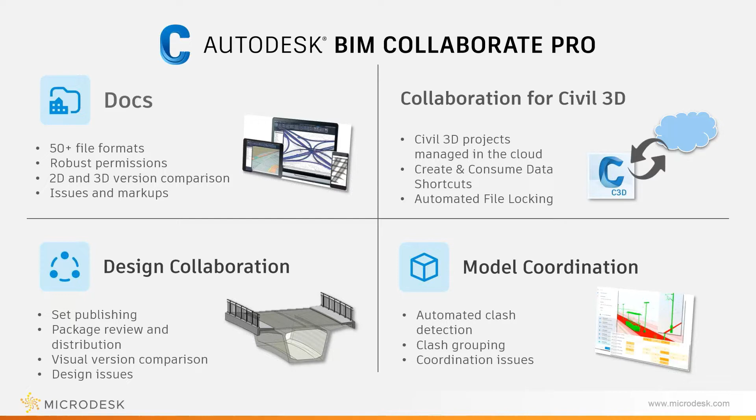Some of the collaboration challenges that we have in our industry are security and accountability, team communication, project complexity, and inefficient tools. So I'm going to jump into a little bit of some of the ways that BIM Collaborate Pro can assist with these challenges.

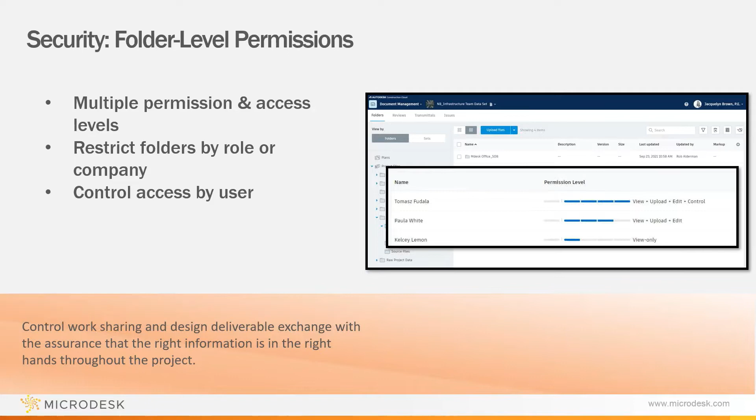If your concern is security, BIM Collaborate Pro can give you a great deal of flexibility to control who has access to design data. You can restrict user access to certain folders, or limit access according to a user's role or their company. You can control work sharing and design deliverable exchange with the assurance that the right information is in the right hands throughout the project.

If your concern is efficient team communication, you can use BIM Collaborate Pro to ensure that your project team is always aware of the project's overall progress. You can ensure everyone meets their milestones and deadlines, and reduce the time it takes to effectively review design revisions.

If your concern is accountability and ensuring that everyone involved on the project is completing their tasks in a timely manner, you can use BIM Collaborate Pro's issue tracking and management tools. With that you can put context around issue resolution with the ability to pin an issue to any 2D or 3D design location, collaborate with common threads, add photos, assign work, and track those resolutions.

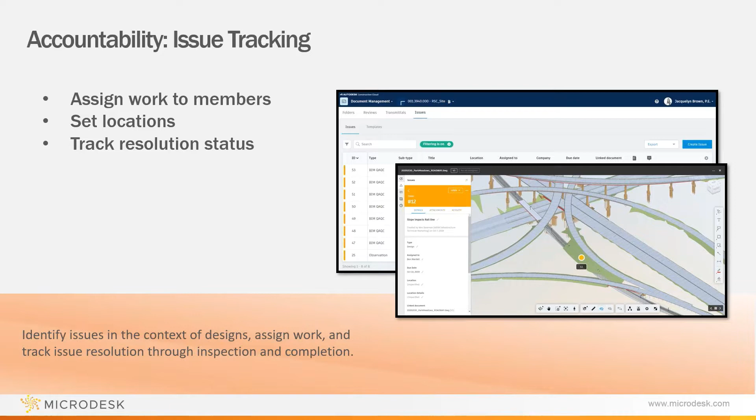Lastly, if your concern is alleviating complex projects by enabling members to better collaborate on designs, you can use BIM Collaborate Pro to enable anytime, anywhere access to Civil 3D and InfraWorks. With this ability, you can extend file collaboration to project teams in any location while centralizing efforts of distributed teams, better allocate resources, and assign the best team members with the most relevant skill sets to each project.

Okay, so I'm going to jump into more of a live demonstration of BIM Collaborate Pro so we can see how some of these challenges can be addressed.

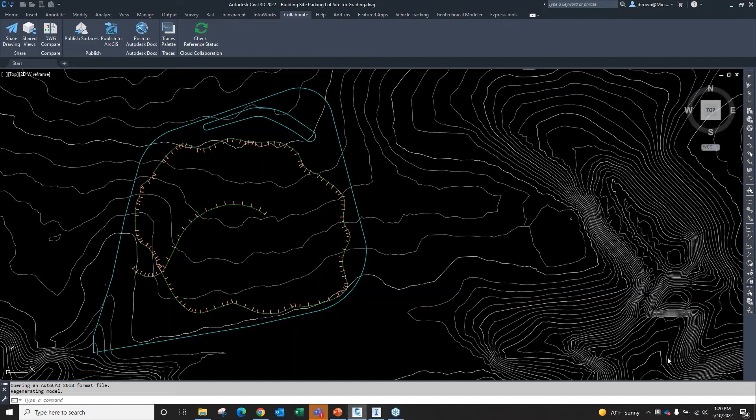And it's checking the latest version each time. I am going to get a couple different warnings here. This is just because I actually copied this drawing from another project. So there are some references, and there are some data shortcuts that it can't find at the moment because I copied them over from another project. So it's just giving me a little warning about that. And that's okay. We'll fix that as we go.

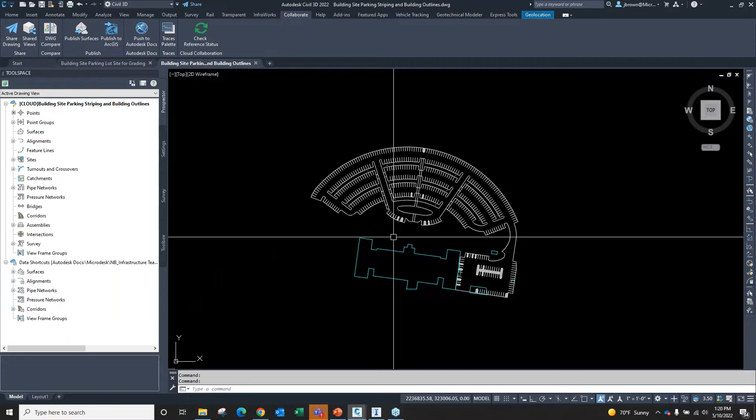And I'm going to open another one here. If I just switch back over to my Start tab, I'm going to open this drawing as well. Okay, so both of these drawings are synced to the cloud. They're in Autodesk Docs. And if I go back to the Start page and I hit this refresh button, you'll see that this is the symbol that it shows when a drawing is opened by somebody, whether it's yourself or somebody else. You can see that it's locked.

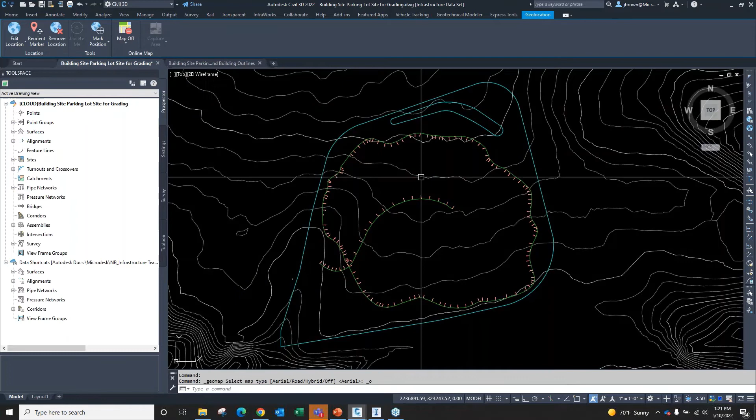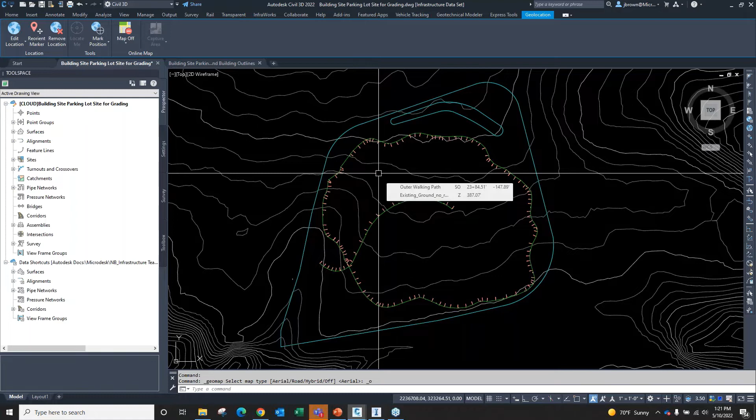Okay. So I'm going to come into this one here. I'm going to go ahead and turn off my aerial so that I can see things a little bit better. And I'm going to XREF a drawing in. Now, whenever you are XREFing or data referencing, you want to make sure that whatever your XREF is referencing is on the cloud as well in your project. If not, you're going to have some issues. It's going to lose the connection. So you just want to make sure that everything you're working with is synced to the cloud.

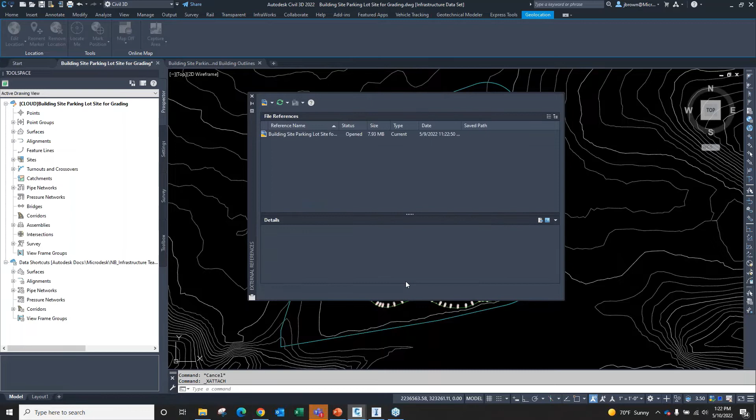Okay, so I'm just going to do the XREF panel like I normally would. I'm going to pull in a drawing, and this is basically taking me to my Autodesk Docs location where I have this drawing that I'm going to pull in. Just the same way you would with a local version of Civil 3D. Okay, so it pulled in that XREF.

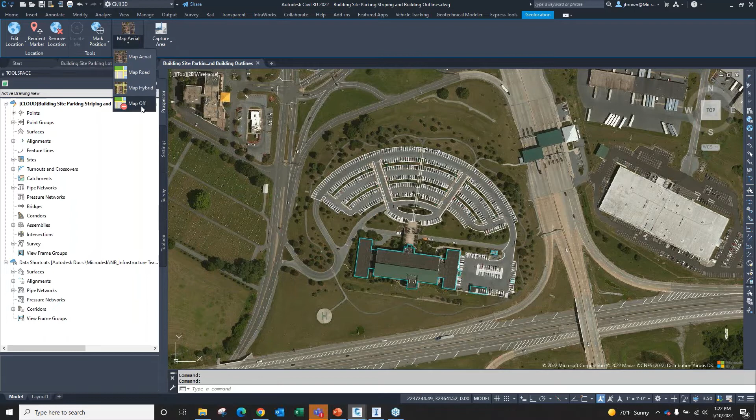Now, let's say that I make a change to that XREF. So I'm going to come in. This is the drawing that I XREF'd in. I'm going to turn off the aerial again here. And let's say I make a change. So I'm going to maybe just erase some of these things that are in the parking lot over here. I want to get those out of the parking lot. Okay, so I'm going to save that.

Now, normally, you'll see that, and it's kind of the same type of pop-up that comes with a local version of Civil 3D, although it looks a little bit different. You can see that an XREF was modified. Okay, so I can click that. It's gonna actually let me compare the changes. I don't need to do that, but you can see that in red, I can see what has changed.

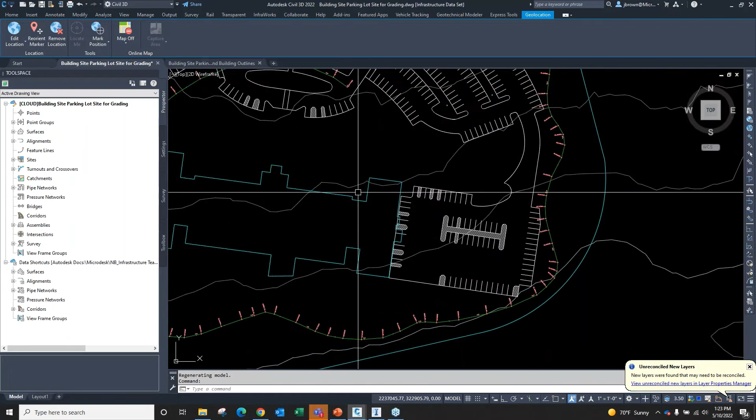If I would have checked off that button, it would have just reloaded the XREF and I could just continue on. But it is a good way to kind of see what has changed. I also have other ways to see what has changed through Autodesk Docs as well. I'm just going to click that. It takes me out of the drawing compare, and I see that I have my new drawing in here. Okay, so that's how you want to do XREFs. You just want to make sure that everything is in the cloud so that you don't run into any issues.

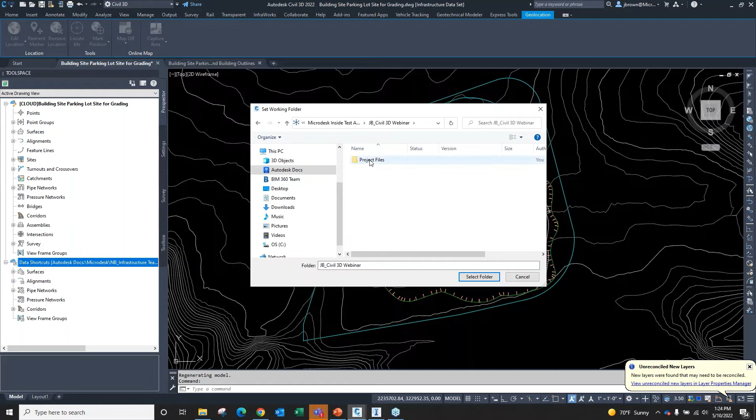And then just talking a little bit about data shortcuts. They work very similar to the way that you normally use data shortcuts. You're going to set your working folder. It's going to be the same situation where you're going to kind of go through the desktop connector to find your project. And I believe that's the one I want for my working folder. And then I'm going to set my data shortcuts project folder. I happen to already have one created in here. You can also create one just like you normally would. You can create a new data shortcuts folder.

Okay, so I can now see the path to this, and I can see that it says Autodesk Docs here. I'm just making sure that what I'm connecting to and what I'm data referencing into my drawing that's on the cloud is also coming from a data shortcuts folder that is on the cloud. The last thing I need to do before I create a data shortcut is to just associate the project to the current drawing. That'll just allow me to not have any warnings that pop up.

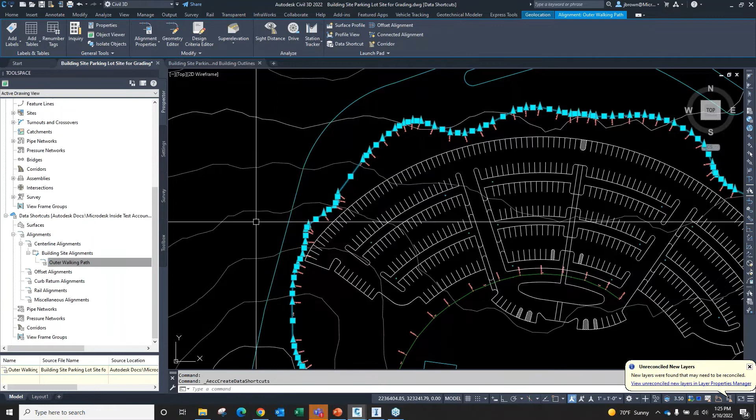Okay, so what I'm going to do then is I'm just going to take one of the alignments that are in here, maybe just for this walking path that's around the site, and I'm going to create a data shortcut for that. Actually, I'll just click on it here. And create a data shortcut. So then I should see it populate down here in my alignments, and there it is. Okay. All right, so now I can bring that alignment into any other drawing as a data reference.

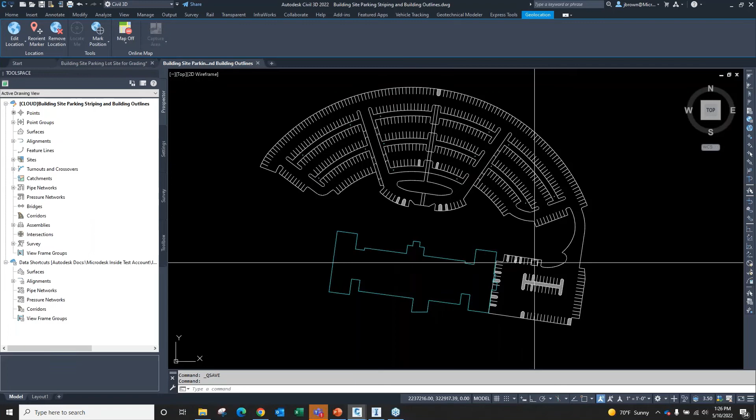Okay. And just to show you also in Autodesk Docs that you can do a version compare. So let's say, let me see, I did save this one. I'm going to compare just this drawing where I removed those objects. I can click on the V4, which is basically there's 4 versions of this drawing. The one that's current will be at the top. I can go to different versions if there's something that got lost or something happened.

I can switch to a different version and make that one current just by clicking this button, or I can compare versions. So I'm going to do that. And I'm going to compare the V3 with the V4. I just have a 2D view, but you can also do this in a 3D view if you would like. When I say compare, it's going to show me the changes.

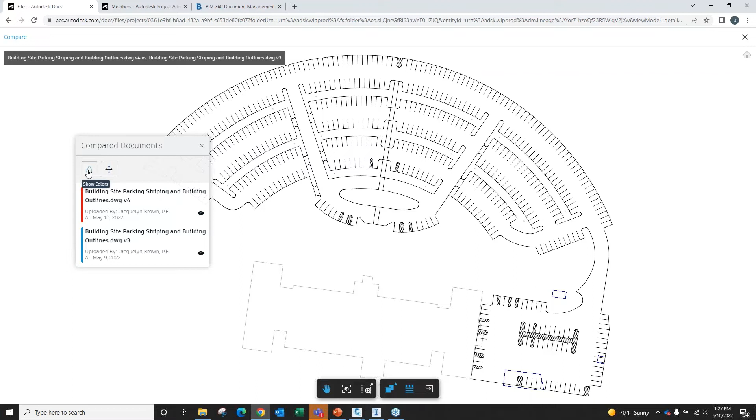So basically the blue is what was in the version 3, and the red is what was in the version 4. I can do a... I'm sorry, I just can't find it at the moment. You can also use a bar to scroll between the two to see. You can change the colors here, things like that. So what is in color is basically what is different between the two. Okay.

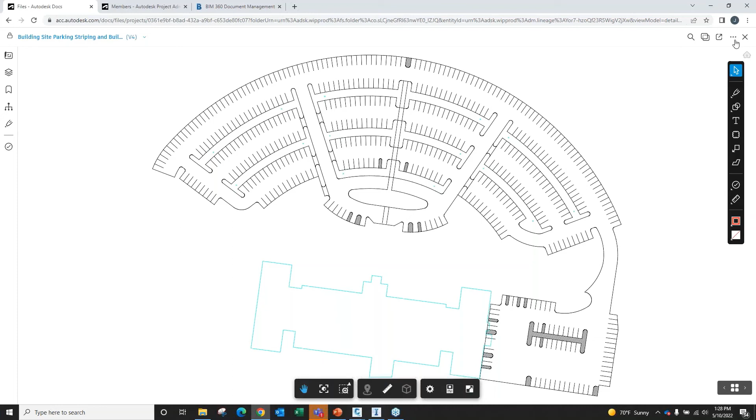Okay, so jumping into some different things that we can do inside of Autodesk Docs, such as markups and reviews and transmittals and things like that. If I click on a drawing, I'll do this one here. And I can tell that I didn't save it because I can see the parking lot's not in there. So let me go back and save this. It's going to create a new version. And I'll go back in. And that's not the one I wanted, I'm sorry. It's the other one.

And it might have just taken a second to sync here. Let's give it a second. Go back out of the folder and come back in. Yep, it's syncing. You can see now I have a version 5. So sometimes it just takes a few seconds to get it back to the most up-to-date version. But if I just click on the drawing there, it's still processing, but I'll be able to see it in a viewer and I'll be able to make markups and things like that. Not sure what's taking it so long.

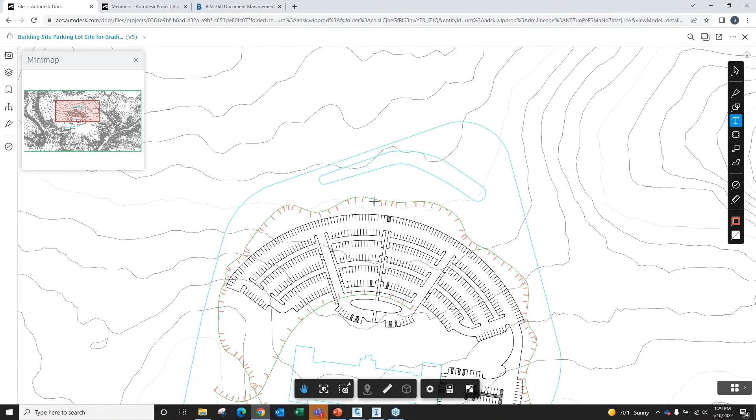Here we go. Okay, so I have my markup tools over here on the side. You can use a pen, text, clouds, leader arrows, you can do a free form polyline, you can measure things like that. So I'm going to go ahead and just add some text, and I can zoom in and say, let's say that we need to have another entrance maybe that comes from the road that's over here. Wow, that's really big, but let's see, add entrance. You can change the coloring.

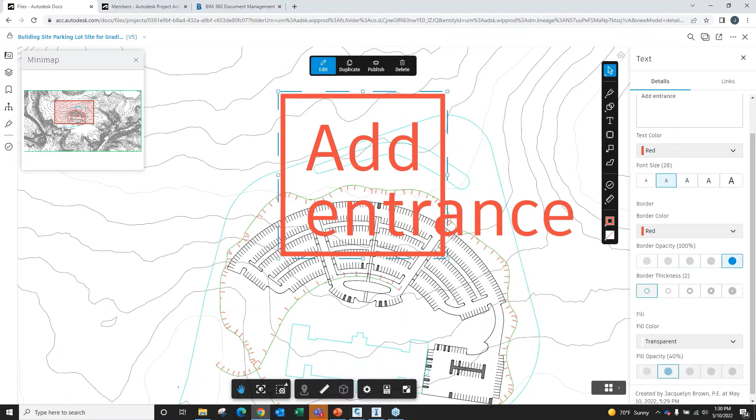You can change the opaqueness of the border. You can change the border thickness. I'll make it a little bit smaller. You can change the font size. And I'm going to just definitely make this a little bit smaller here. So you can also change the transparency, things like that. Now, this can just be a markup for me, or if I choose to publish it, anyone else that is a part of the project can see it as well. Okay, so that's how the markups work.

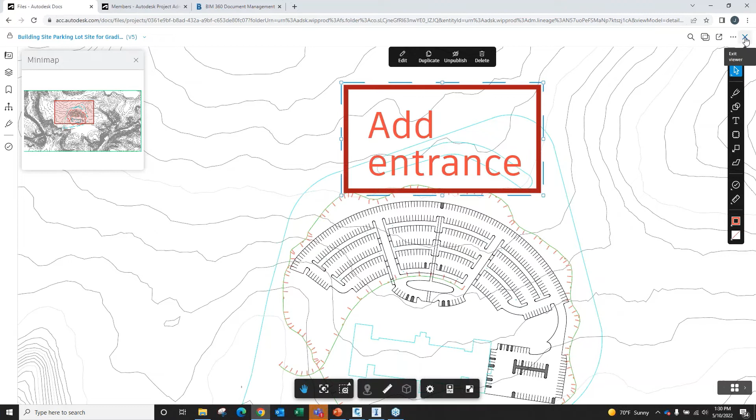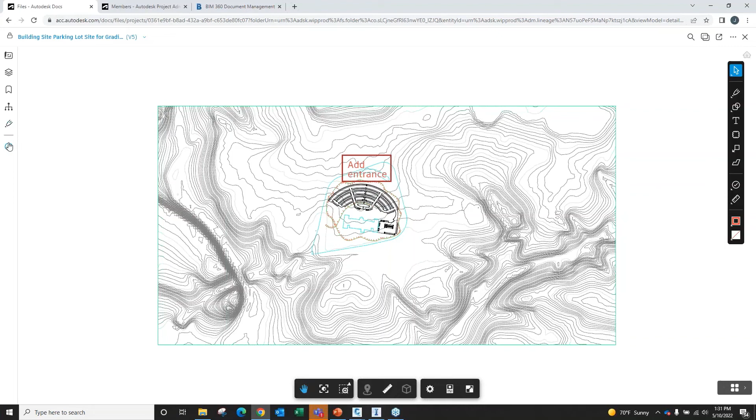Now, if I close out of this and go to issues, well, there's no issues in my project right now. Let me go back to my files. So I can place an issue at a specific point in the drawing. So if I click on here, I can go to issues and I can create a new one. So, I'm just not seeing my button to create the issue.

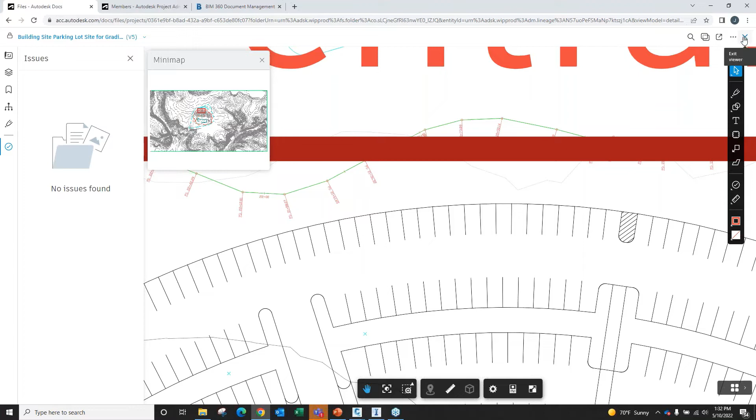But you can select a spot and you can assign an issue to a person. That person can come in and resolve the issue, you know, do whatever needs to be done. Sorry, I wasn't seeing the button that I was supposed to see here. Now, whenever you do markups, you can also see inside of the drawing here that there is a published markup there. So you can go in and view that.

Okay, and then we also have reviews. So we can choose to create a new review. Now, reviews are basically, I can add which files I want somebody to review. Let's say it's this one. Or you can do multiple at a time. Now, reviews need to have a workflow associated with them. So it does come with some templates for workflows, or you can also create your own workflow.

So let's say I'm going to create a new workflow, create an approval workflow, and this is just going to be a one-step approval, but you can see you can have multiple steps. It can go through different people. You can make the approval pretty complex, but let's just do for simplicity a one-step approval. Okay, so I'm going to give this workflow a name. We'll call it one step.

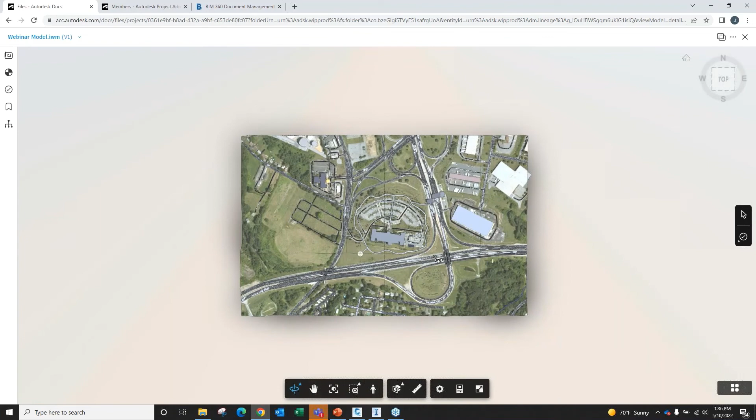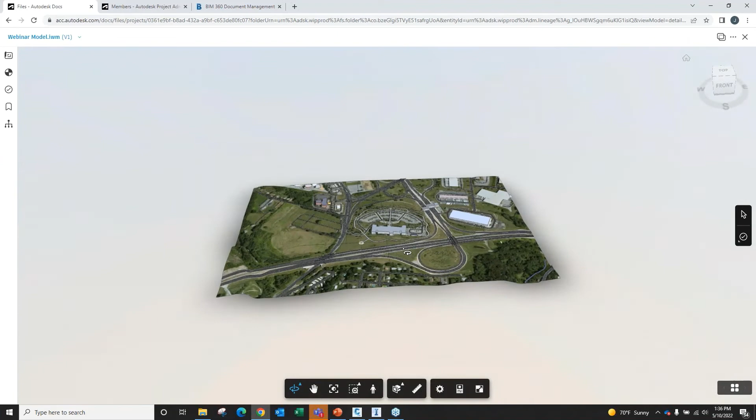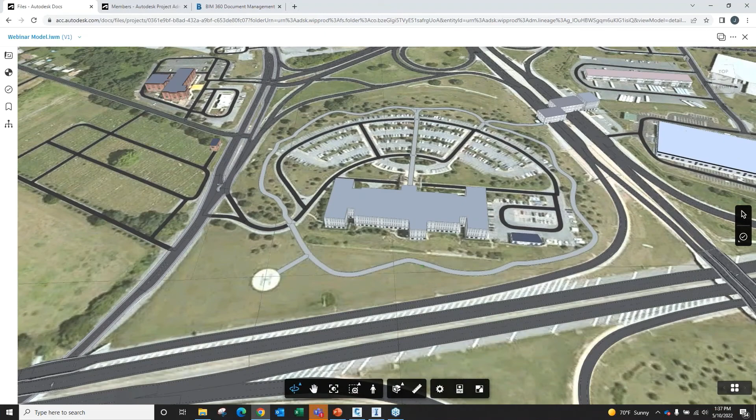So jumping over, I also just want to show you that not all the same things, but the same things that I've been doing with the Civil 3D files, I can also do with InfraWorks files. So I can see my InfraWorks model that I have here as well. Let's see if I can add an issue here. No. But you can view it, you can rotate around, you can measure things off of this. So you don't have the same review tools that you have with drawings, but you can view, and anyone, even if they don't have InfraWorks, can view the model here in Autodesk Docs.

And jumping over into InfraWorks as well, it's kind of the same type of menu where you have your most recent models, and then you have your Autodesk Docs models where you can go to your account, go to your project, and then you can open a model from here. You can see the version, you can see the status, you can see where it's saved, and more information about it as well. Okay, so some of the same features in Civil 3D, you have those capabilities in InfraWorks as well. I know I'm focusing mostly on Civil 3D, but you do have those in InfraWorks too. Okay.

All right, so jumping into a couple of the other modules. So we talked about Autodesk Docs, but we also have Design Collaboration. Now, when I went in and created this project, I created some project teams along with it. So you will see when you create a project, you have the option to do a team setup. So I created a civil team and a survey team. And I also have those two separate folders inside of my project setup where I have a civil folder and a survey folder, and I have drawings located within those.

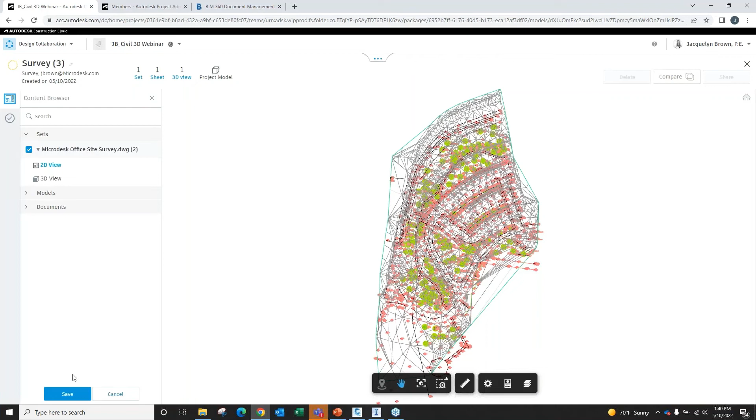So I can see I really only have one drawing associated with the survey team. So I'm going to check that drawing. I'm going to save that package, and then I'm going to share it.

Okay, so you can give it a name, whether this be a design 30%, 60%, 90%, whatever it might be. You could call it that. If it's just a review package, things like that, you can give it a name and you can give it a description. It's probably good to be a little bit detailed with that so that you know what it's for.

I'm sharing the package. So then I should be able to jump back to my home screen and see that I have a couple of things here. And this is a timeline, by the way. This is basically what has happened for my project. So if you've been working on a project for a long time, sharing, consuming different things, you can see that the timeline gets much longer. Mine is only a day long because I've only worked on this today.

So the more that you collaborate, the more items you'll see that there's different packages that have been shared, and you can see the history of that as well. So now I'm going to switch to the civil team. And this actually is the newer one. The yellow dot turns to a white dot, which if I click on that, I can see what that package is. And since I'm in the civil team, I can choose to consume that.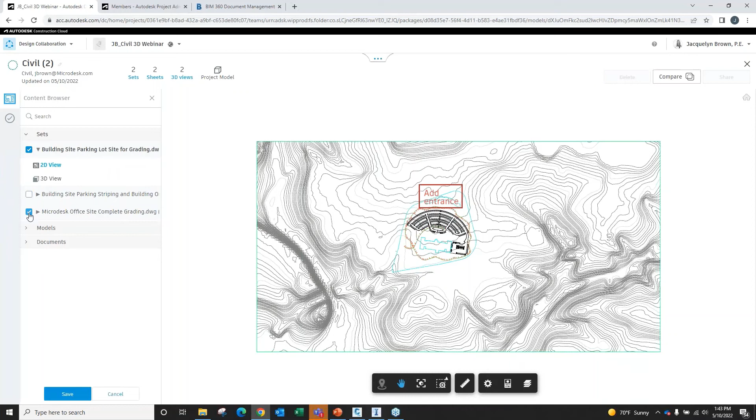So let's say I want to create a new package of civil for anyone else to use, not necessarily survey, but anyone else who might want to use it. I can create for the 3 different drawings, save that package, and share it. I'll do this one drawing first and share that. So you can give it a name and a description and share it. I think we have to do one at a time here. Oh, it did grab all of my 3. It calls them models. They're basically drawings.

Okay, so if I switch back to home, I'll be able to see if I'm in survey that I have the white dot there. I can click on it and it is just the one drawing there. Oh, and the sets and the models are 2 different things. If I choose models, I can consume all 3 of those drawings. Hit consume, and then I'm going to show you in a second that it basically creates a consume folder inside of your team folder.

So you can see that in the civil folder, I now have the survey package that was consumed into my civil folder. It's basically a copy of the survey drawing at that moment in time. And the same thing with the survey drawing. I now have a consumed folder with a civil package inside of it.

Okay, so it's basically a way to share drawings between teams at milestones or along the project completion, to make sure that everyone's using the most up-to-date drawings for their teams. And you don't need to constantly be sending another team an updated drawing. If you have a schedule worked out between the teams, you can say, I'm going to share my package at a certain day, maybe weekly, maybe monthly, whatever it might be. And then the other team can use that drawing however they would like.

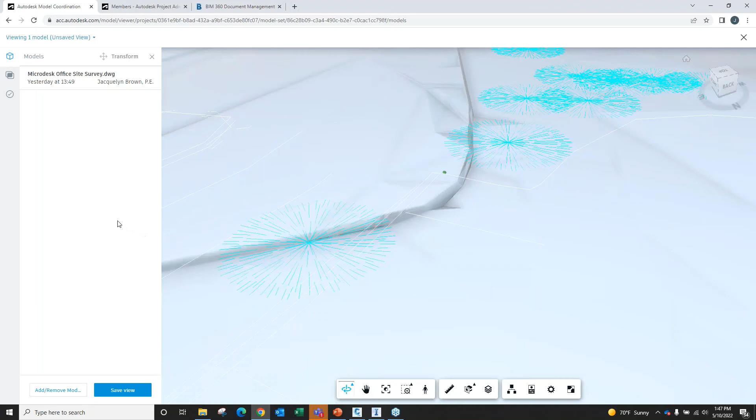It's a little bit difficult to navigate here, but let's just say I'm going to save that view. Give it a title, curb line. You can make it private or you can publish it. So anyone who is a project member will be able to, in the coordination space, see that view. Okay.

So if I go back over to views, I should now be able to see that curb line view, and you can create multiple ones, whatever it might be. So jumping back over to clashes, if I do have a saved view of something zoomed into somewhere where there's a clash or I want someone to look at, I could choose that view. I can choose which models I want to show the clashes for, things like that. Maybe I'll take the survey off of there, apply.

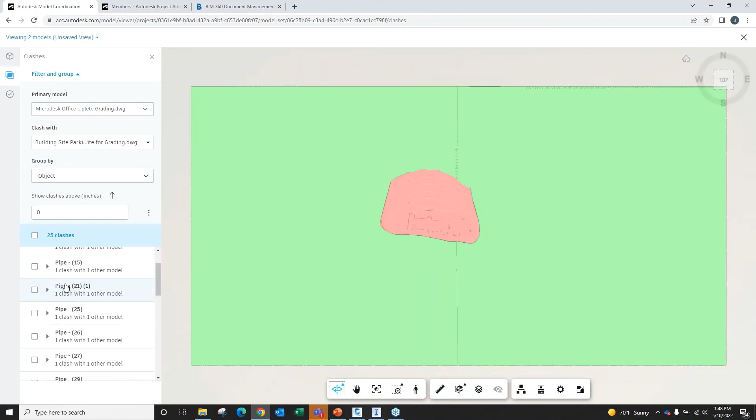So there's 25 clash groups. And you can see that there are some pipes in here that are clashing with other things. If you click on it, it's maybe just like my pipes are clashing with my surface or something like that. So some of these might not be a great example, but you can see that there are 25 clashes that occurred, and you can locate where those clashes are.

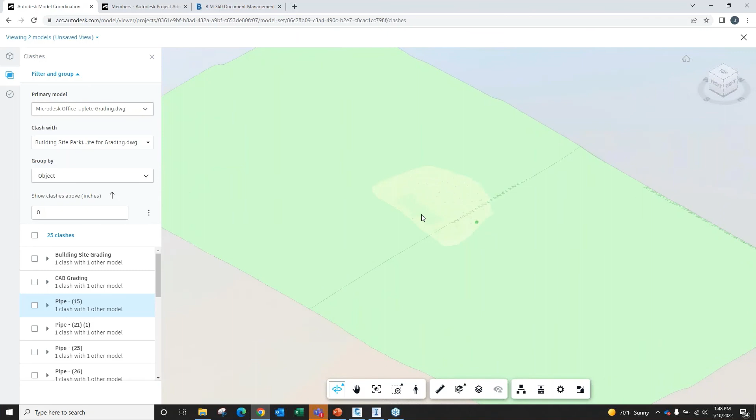Okay. So like I said, it doesn't have to be between two drawings. It can be Navisworks, Revit, or Civil 3D. And I think there's a couple other things as well, but those are the main ones. Okay, so that is mostly what I wanted to cover today. Let me jump back over to my slides.

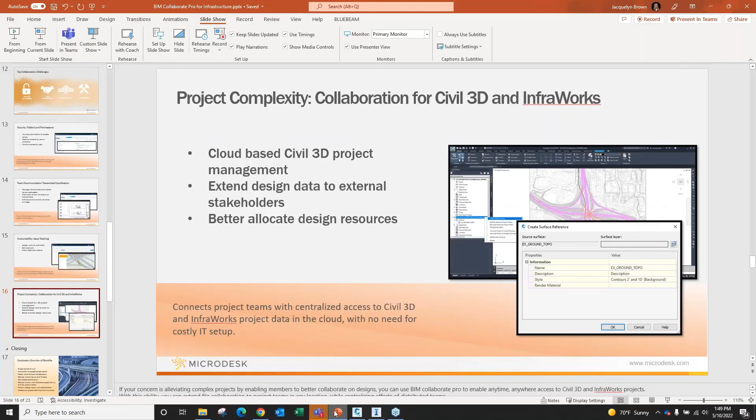So just a little bit of an overview of the benefits of BIM Collaborate Pro. You can have anytime access to your Civil 3D models or your InfraWorks models from anywhere in the world. Your design team won't waste time. You can do virtual collaboration, which means that you can distribute things between design teams, or remote staff can model from wherever they happen to be. Your physical address doesn't really matter anymore. You can extend your reach and participate in projects or joint venture partnerships wherever you're located.

It's better allocation of team talents and resources, so you can assign the best team members with the strongest skill sets and talents that you need. Designers can work on multiple projects based in different locations at the same time. And everyone can be included, so you can give access to project team members, partners, or consultants who don't have Civil 3D or InfraWorks, and they can have a real-time view of the models and communicate faster to project team members.

Okay, so if you do have any questions, you can type them into the questions panel. Okay, I see I do have one here. Which elements, if any, of the various collaboration tools are free or within the AEC collection? So Autodesk Docs comes with the AEC collection. None of them are really free. The AEC collection comes with Autodesk Docs, but that does not include the collaboration tools. Really, you would have to get BIM Collaborate Pro for those.